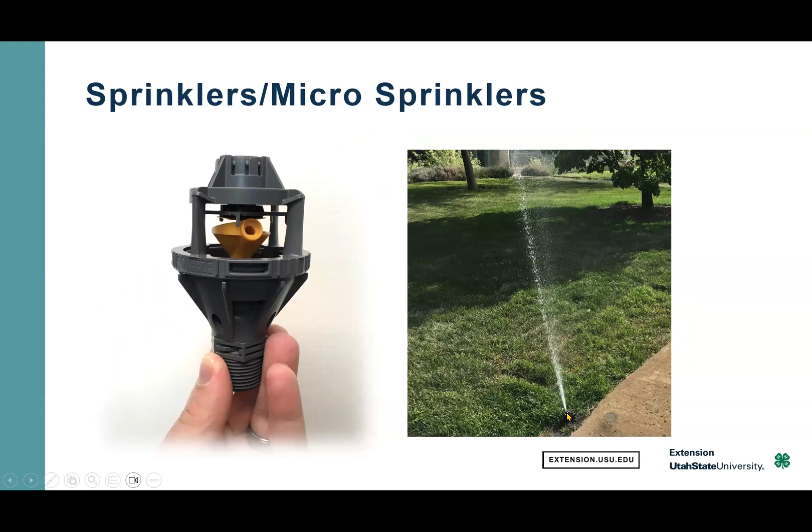For sprinklers, it's a little more simple. We have a nozzle in a lot of our rotating sprinklers. Sometimes the actual nozzle is hidden, as it is in this device, and this is just a distribution tube that rotates around. So you've got basically two orifices you've got to watch out for. Here is a lawn sprinkler, usually just a single orifice.

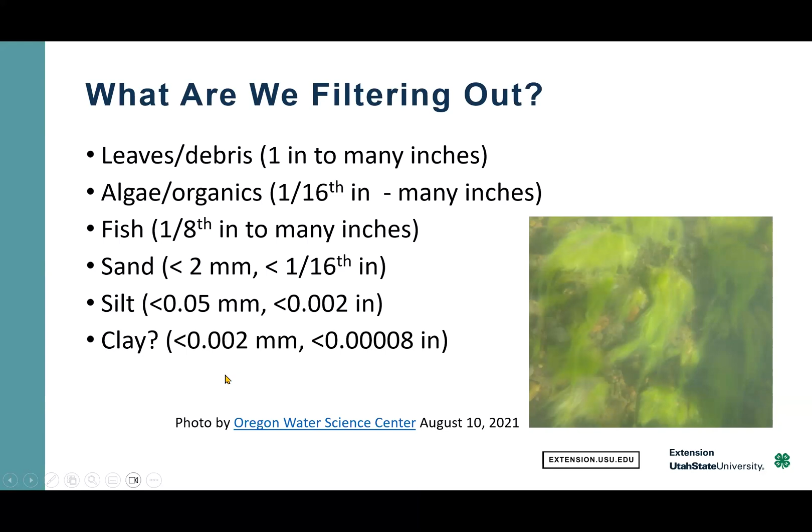A lot of times we also have inorganic materials. We may be trying to exclude sand from the system, which could settle and cause clogging issues or abrasion issues. Sometimes silt, but you'll notice how small silt is, so we're going to usually have a difficult time filtering silts. Clays, with conventional filtration, we're not removing clay particles from the water. Clays we call colloidal because they are colloidal, so they are solids that stay suspended in the water. Usually clays don't cause huge problems, but we'll talk about some cases where they can.

If you haven't worked with filtration a lot before, it's helpful to be familiar with the concept of mesh size. Most filters are sold based on a mesh size, with a larger size being a smaller particle that would be trapped by the filter.

Usually in irrigation, for drip irrigation and small sprinklers, we're going to want to filter at the 80 to 120 mesh size. Some drip needs even down as low as 200, and some sprinklers can get by with quite coarse screen. If you're trying to get larger particles, this is about 1/8 of an inch at a 5 mesh. If you're talking about larger particles than that, then you're just talking about porous screen, and the dimensions are a little different. You'll get a copy of these slides for your reference, but you can also just search mesh size and get an idea really easily.

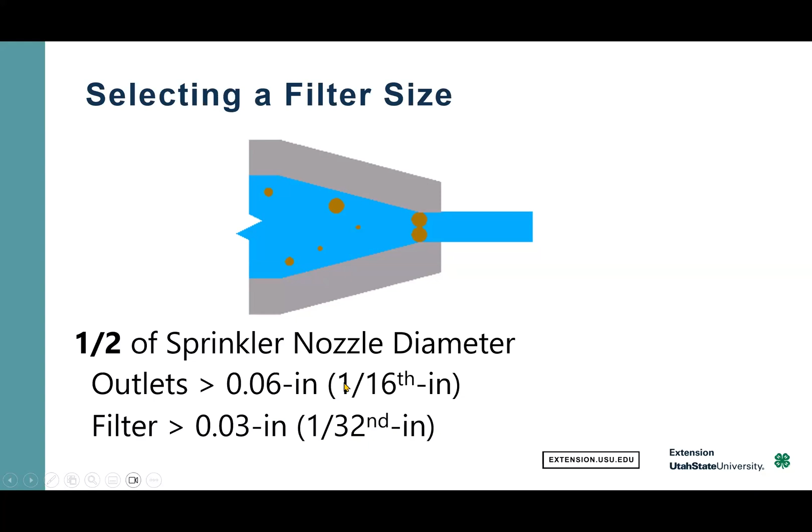What we want to do with a sprinkler is filter out any particles large enough that two or more could bridge the nozzle and clog it. Usually we can get by with half the nozzle diameter. Most sprinklers will have some indication of the diameter, though landscape sprinklers don't have round diameters, so you might have to look or estimate based on the device. Often our outlets are 1/16 of an inch or larger in diameter, meaning we need to filter out anything 1/32 of an inch or larger. That gives you a general range for most sprinklers.

For a micro sprinkler, using the same sketch, we get into a range where really small particles matter. We're no longer worried about sand particles, but particles in the silt range that can clog these sprinklers, often bridging with more particles. A rule of thumb used by Charlie Burt and others at California Polytechnic University in San Luis Obispo is 1/7 of the sprinkler nozzle diameter for micro sprinklers. Often the minimum mesh size will be provided by the manufacturer, but this 1/7 rule is a good general guide, meaning 6 to 7 particles bridging together can clog the nozzle.

So we often have sprinkler outlets in the 32nd of an inch range to maybe 1/10 of an inch range. That means filters in the 4 thousandths to 14 thousandths of an inch range.

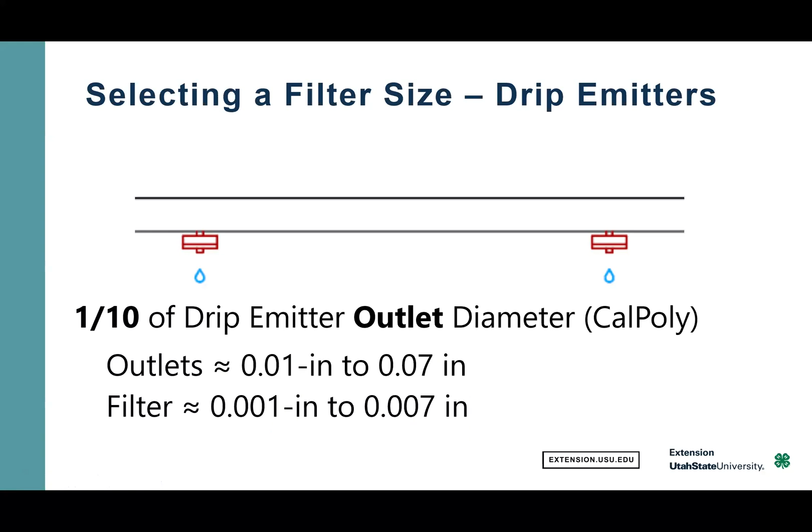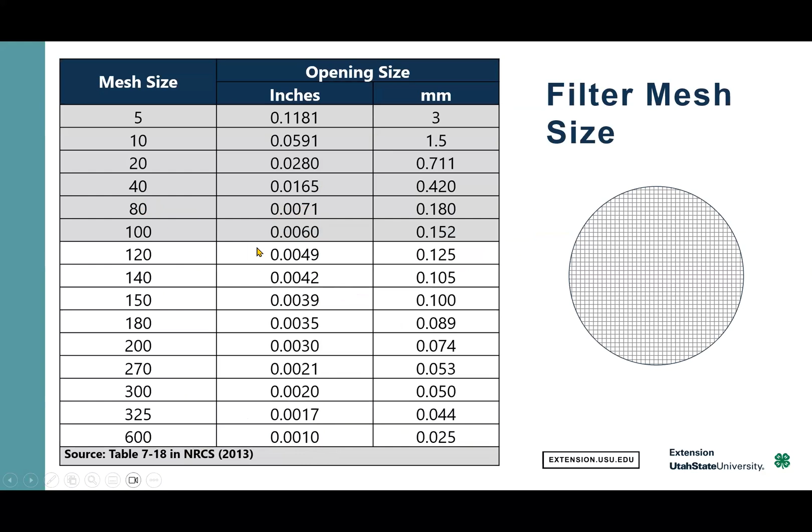Pretty small. If we go back to this table, 7 thousandths of an inch is about 80 mesh, as I mentioned, while 1 thousandth is down at 600 mesh, which is very rare. It's common for drip to require something in the 120, maybe as small as 200 mesh range.

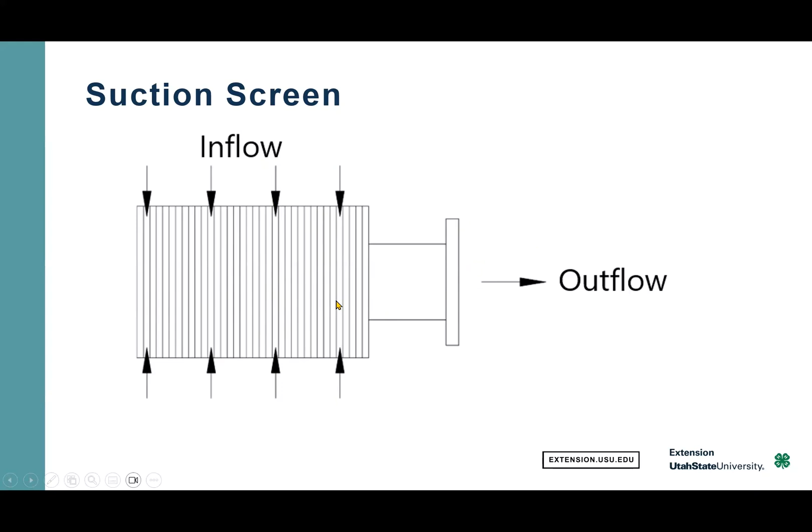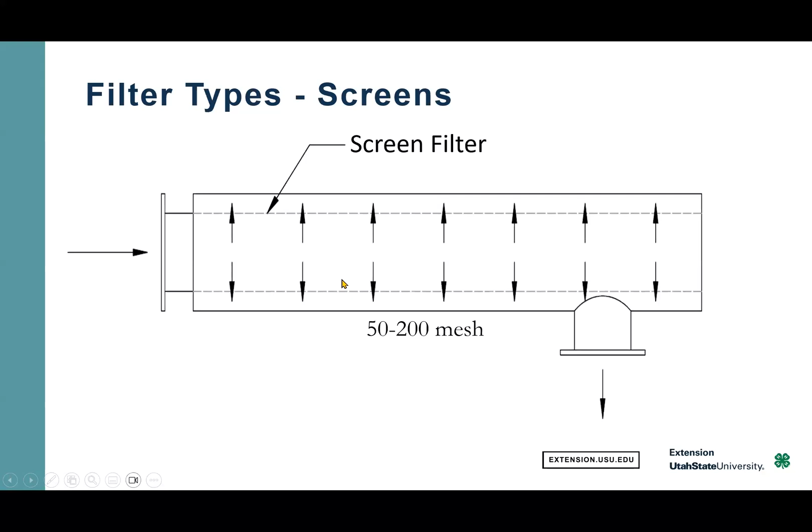Another type of filter that's very common for this scale of irrigation system are disc filters. I actually really like disc filters. I don't sell them, so if you feel like I'm giving them too much hype, I apologize for that. But I really do like disc filters.

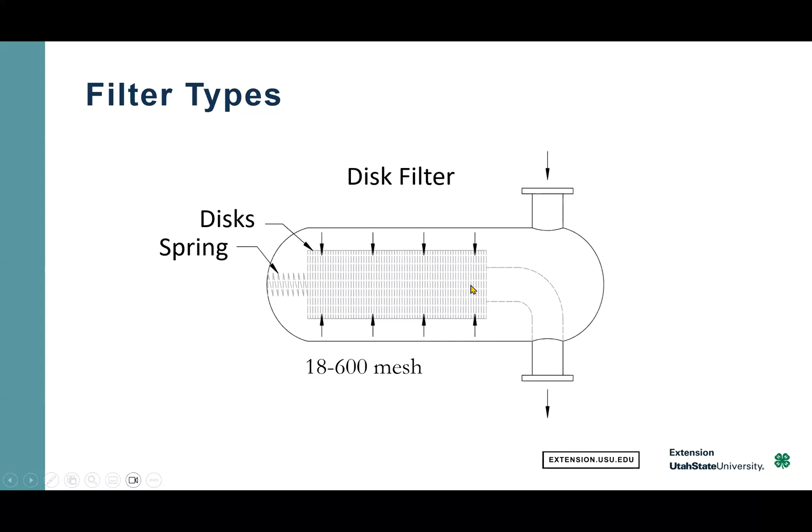Notice that when I unscrew the case, the springs decompress, and I should have taken a close up. The discs have diagonal slots all the way around both faces that line up crosswise with diagonal slots on the disc on either side of it. So when they're pushed all together by that spring, there is actually quite a large filter area inside the discs.

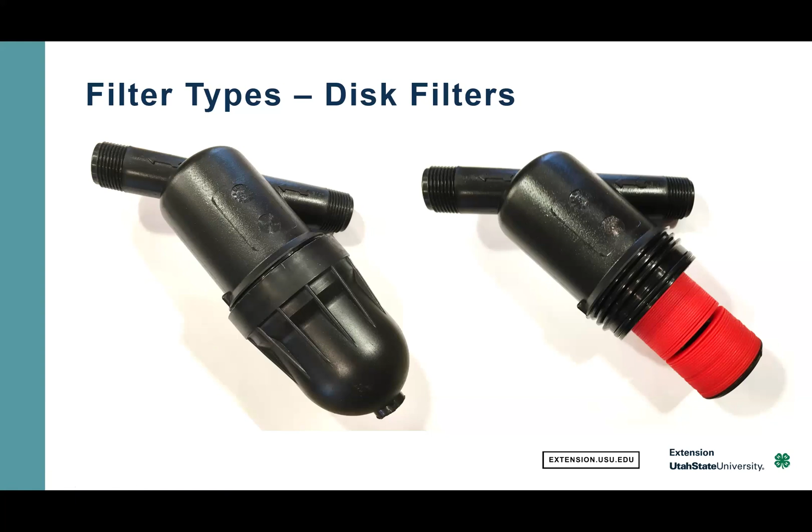And then when you clean them and you remove the compression from that spring, you can rinse off between the discs. So what I like about a disc filter is the increased filter area and the ease of cleaning. However, most that are practical on a small scale still require manual cleaning.

It's just a big vessel where the water comes in, hits that wall and swirls around. That swirling accelerates sand particles out. So the larger particles get flung out against the wall of the separator. They fall downward because of gravity and accumulate at the bottom where they can be flushed out. Clean water works its way up through the center of the device.

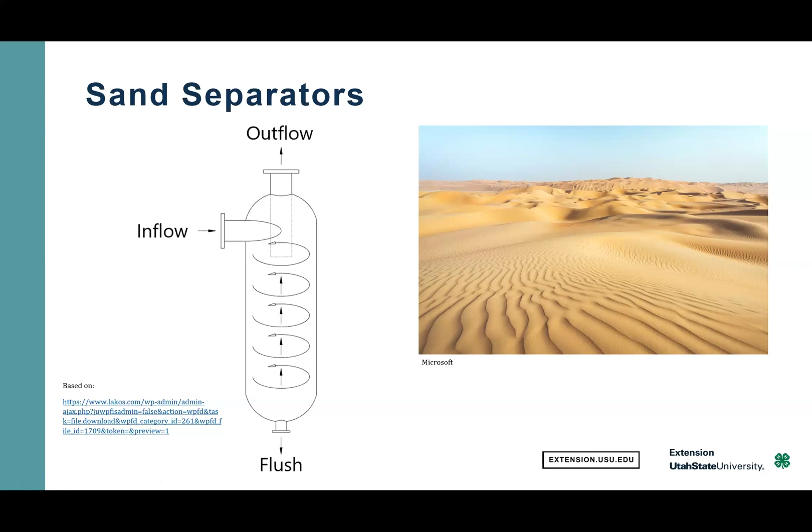A sand separator is a primary or first stage filter. You would usually need another finer filter after. But again, this is only going to work for large particles like sand, not as effective for things like leaves, algae, other organics.

Okay, so now we talked about types of filters. There are others that are typically used in larger systems like sand media filters, or what we just call media filters now because they often have a filter media that's not sand. And we have self-cleaning filters we'll talk a little bit about.

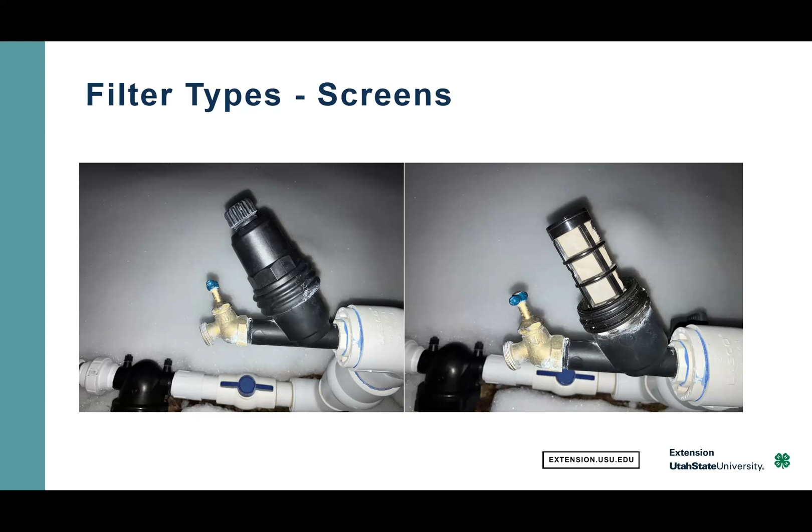It's more than enough. In 2023, when there was a big spring runoff, we got a whole lot of filamentous algae. And I had to clean that thing at a minimum every irrigation, and sometimes more than that, because that algae would clog it off. So if you're running into a situation like that, you're better to have a little more filter than to have the system get choked off.

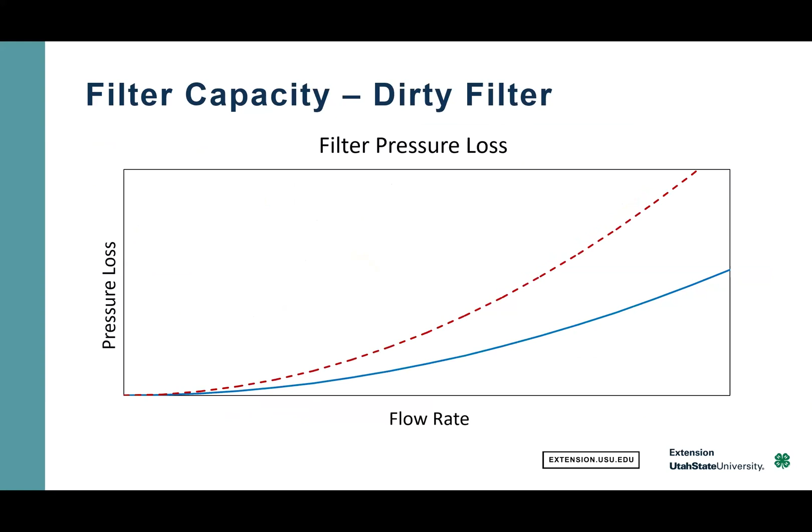Okay, this is an example of what would happen. Say we picked one of those filters. In this example, I picked that medium filter, and if we start getting clogged, what happens is that blue pressure loss curve starts to move upward. And it moves upward kind of proportionally. So more flow, more loss. Okay.

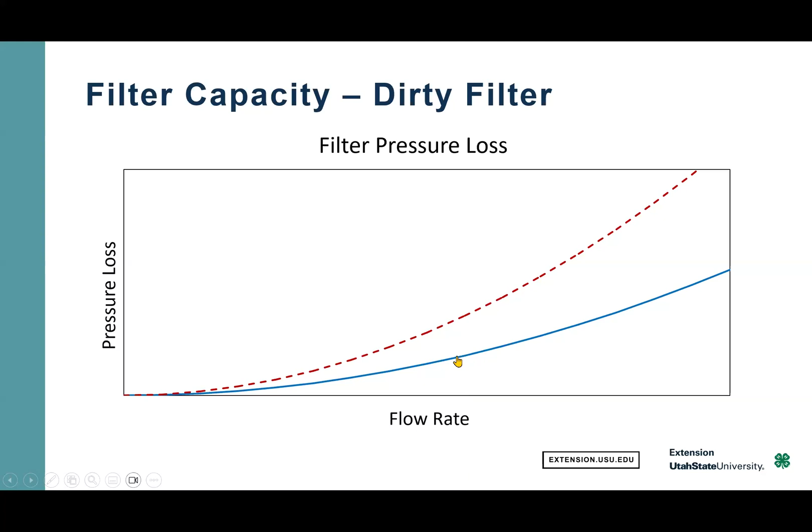All right. Now, here's the problem for the system. This product, this is a Netafim Typhoon. This is a commercially available drip line product, drip tape. This is for about a 0.5 gallon per hour product. So if you're buying drip products that are meant for agriculture, this is on the big side for discharge, about 0.5 gallon per hour. If you're buying for landscape, this would be on the small size.

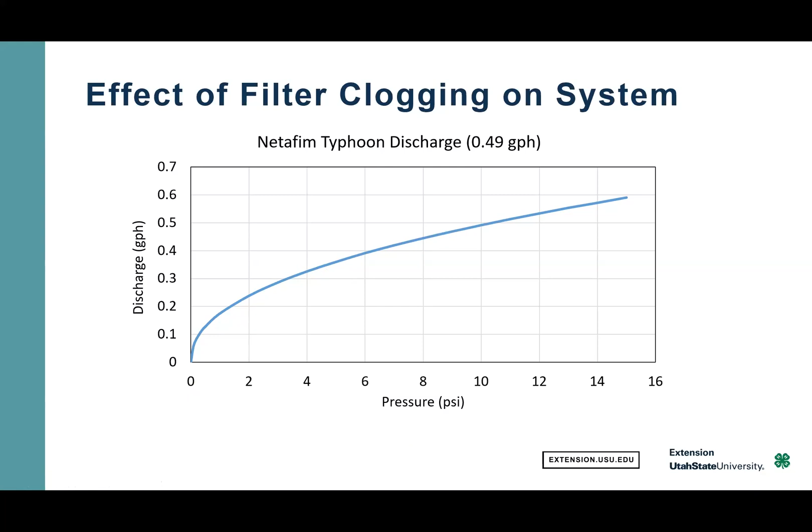Landscape usually uses about 1 gallon per hour per emitter, and sometimes agriculture is as low as 1/10 of a gallon per hour per emitter, but you get the idea here. The emitter discharge for most drip products is related to the pressure. They're usually rated at what they do at about 10 psi, as is the case here. Now, what if my filter's clogged and is losing 2 more psi across the filter than normal? Well, in this case, that is somewhere in the 10 to 15% of flow reduction. And it gets worse and worse the more you get clogged. So then you're not applying the water that you thought you were for the same application set time.

I want to take just a second and go back to cleaning methods. I had mentioned manually cleaning filters. Well, that's what I'm calling here the brute force method. You turn off water, you open the filter, and you clean it manually. Really effective. It can be quite time consuming, especially if you have a fairly large system or you can't be present all the time. There's another kind called a hand crank, and I'm actually not a very big fan of these. These will be for screen filters.

And what you do is there's a brush that kind of spins around the inside of the filter. And you open a little valve at the bottom of the filter while you run the little brush, and it shoots stuff out of there. They can work, but it's not going to be as good as the brute force method. It can be done while you're running, but they tend to not be quite as good as you wish.

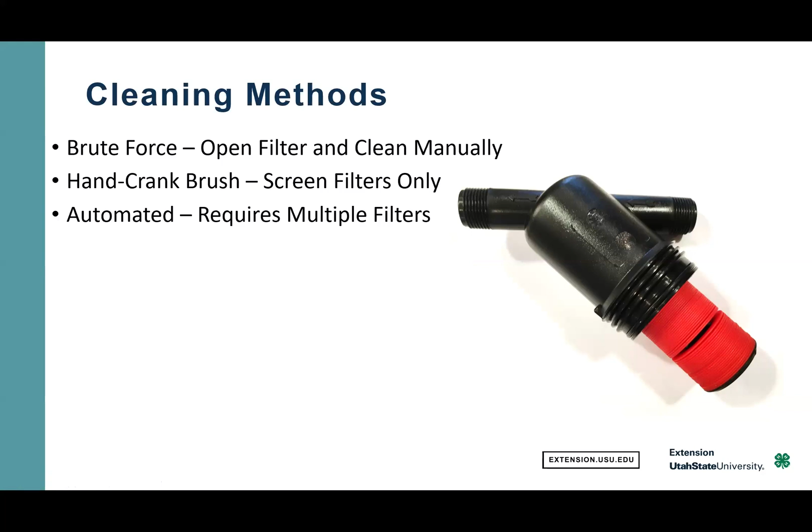There are also automated systems. They almost always require multiple filter bodies so that you can run clean water back through the other to clean it. Those are available for disc filters, for screen filters, and usually cost substantially more than manual filters. Very uncommon to find automated filters less than several thousand dollars.

Okay. Where are we going to put the filter in our system? If you have a pump, you'll have a screen, as I already mentioned, often upstream of the pump. We usually want the filters after the pump. There's a couple reasons for this. One is if the filter gets clogged, it is better to have the pump pushing pressure at the filter than sucking against the filter. It's much better on the pump.

I took a photo, but I didn't add it to the presentation. But I have a pump that I'll admit to owning. For various reasons, I have the filter upstream of the pump. It's just how it works on that system. It's actually the filter I already showed you a picture of. But if I'm not real careful in making sure that that filter is clean enough, it can choke off that pump, which it has done. And then the pump has gotten warm enough that it's blown PVC fittings off of the outlet. Super cool. Really like that. Makes me feel really intelligent.

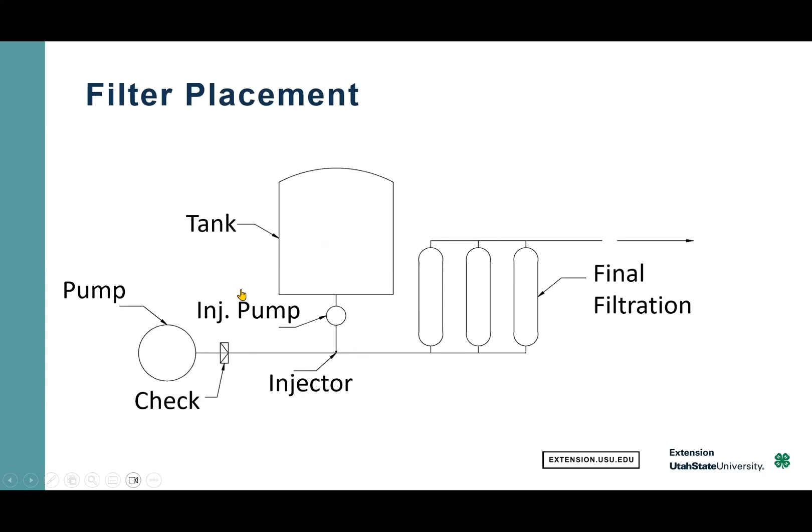So if you have chemical injection, fertilizer, fertigation, which is the next presentation, often we filter after we do that, or we'll have some pre-filter and our final filtration will be after chemical injection. Okay, what else?